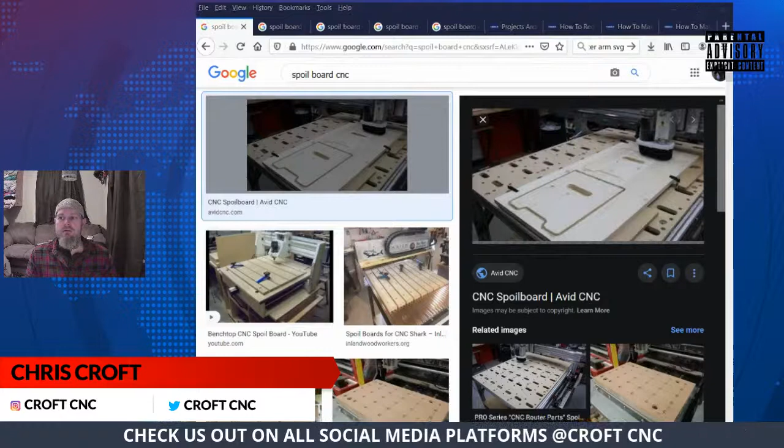This Avid CNC is just an MDF top bolted to an extrusion system underneath. Nothing really of merit on that. It's simple, it's functional, and it gets the job done.

This one actually utilizes a T-track system on top of an MDF slab. Same here, this is an aluminum extrusion bed with T-tracks.

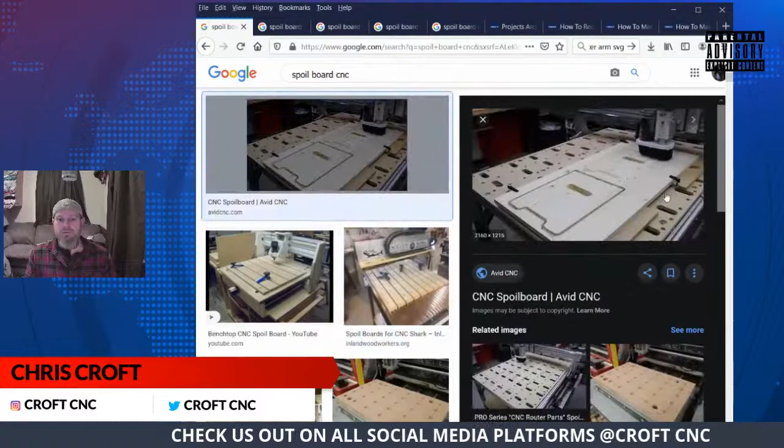These have different clamping capabilities. The Avid CNC has hold clamps for large panels. They have bolt mounts for different clamping of thinner material. This one is basically just a screw-together, quick fixture.

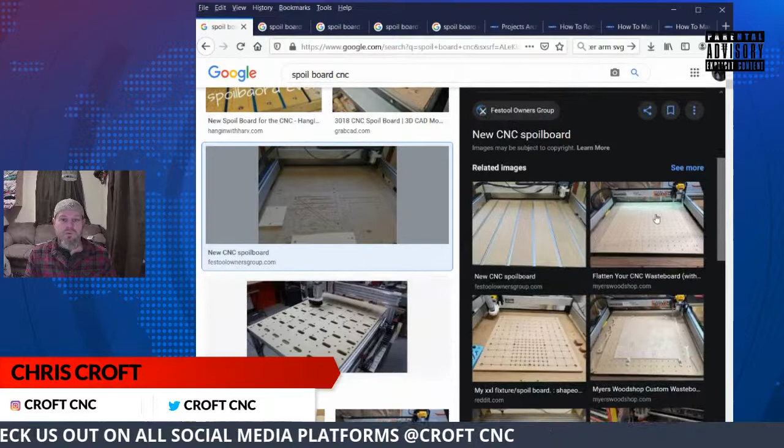This one is a nutsert spoil board where you basically run bolts into these holes to hold clamps and fixtures in place and whatnot. You can see it in use here.

This one, same setup, but different clamping systems, different offsets for clamping systems. There's always a plus and a minus to spoil boards.

This one has a screw system with a dog hole system. So you put these bench dogs in there, and that gives you kind of like a zero plane for X, Y, and then you zero off the top. It has the push clamps, like you could fit a Festool push clamp set in there. Those holes are usually 20 millimeters.

Festool kind of paved the way on a 20 millimeter dog hole system. I'm not quite sure why that took off the way that it did, if it was just marketing on Festool's part, but it is what it is.

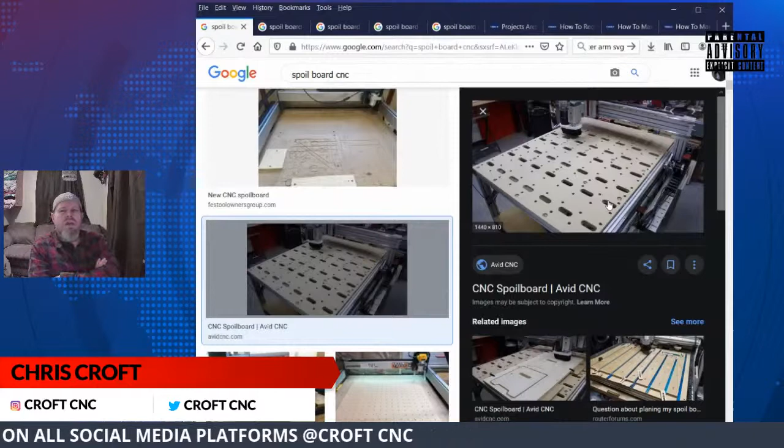A lot of people get hung up on spoil boards, and I can't understand why. So for the CNC for Newbies machine, I'm using a simple Avid style spoil board, single sheet of MDF. It says it's 4x8, but MDF is usually an inch oversized.

The CNC for Newbies machine has 50 inches by 99 inches of travel, and it has spacing: 17 and a half, 35, and 53 are the cross braces, and then zero, the zero point on each end.

So my spoil board's not quite going to cover the whole travel of the machine, and I'm all right with that because I'm not really going to do much. What I will do is put covers over the edge to protect the linear bearings, and then mount on the spoil board.

So what I'm actually going to do is overhang my spoil board to the front and to the sides. I'm actually going to go a half inch off of Y home, and a half inch off of X home, and go 1 inch off of XY, and line my spoil board up.

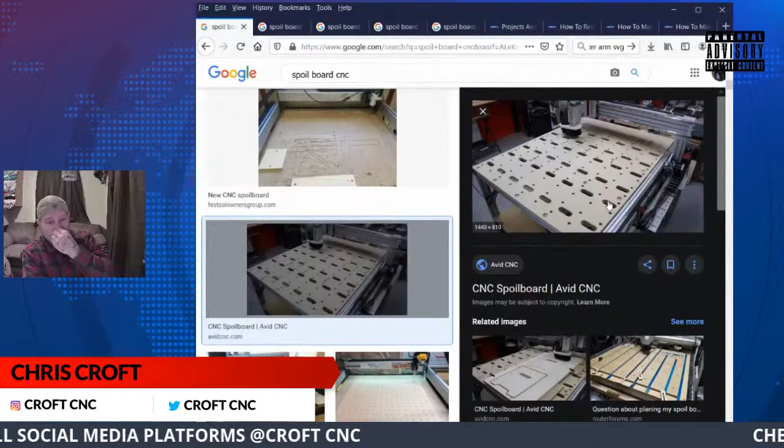The way that I'm actually making my spoil board is I'm using an Avid style with the clamps and the bolt holes. And I'm going to put a pin fixture system on X1, Y2. I'll make like probably a 12-inch fixture system, I think. I still have to kind of figure out where I want to go with that.

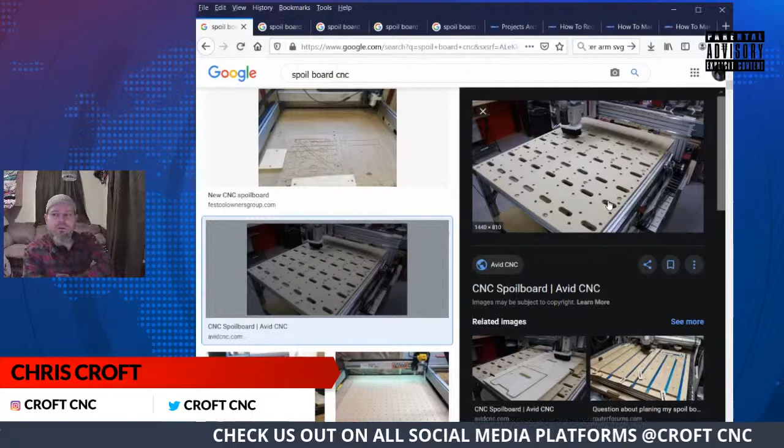I might do like a Mark Lindsay bump stop and go from there. I'm not quite sure how I'm going to facilitate what I want to do there. I'm trying to see. So we've got different setups here.

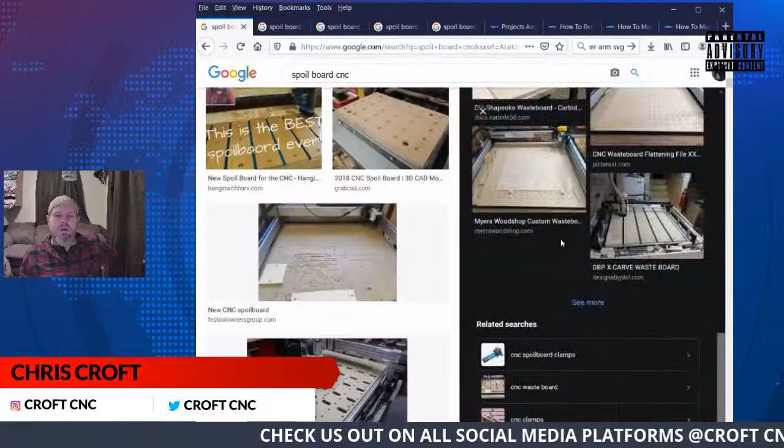I showed you the different kinds of setups, and I explained a spoil board is just a sacrificial board to be able to hold material and cut through material. On a lot of things like the X-Carve, this is the spoil board. My spoil boards are pretty destroyed. I'm pretty rough on them, just because.

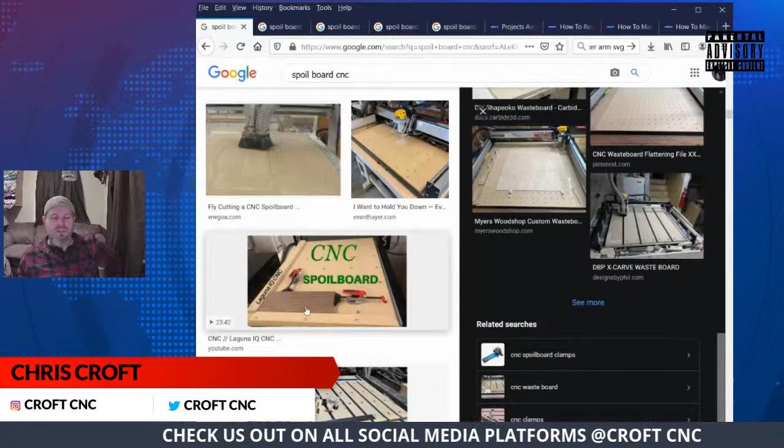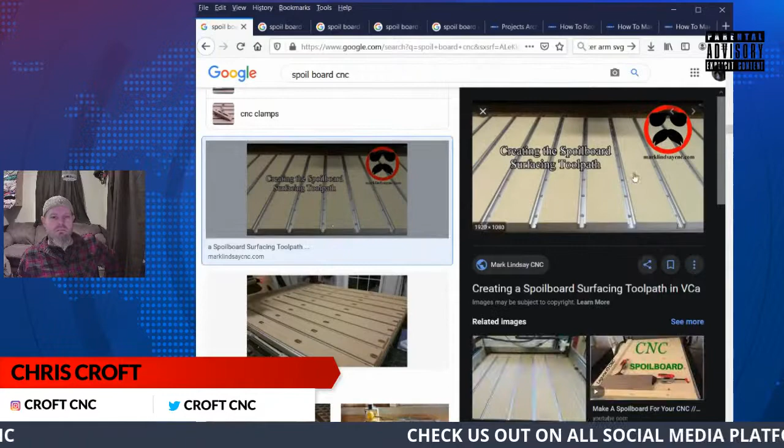But one thing that you want to do is definitely figure out a fixturing system on clamping and positioning. And you also want to make a bump stop zero fixture. I recommend watching Mark Lindsay's bump stop series. And then you need to actually tram your machine first.

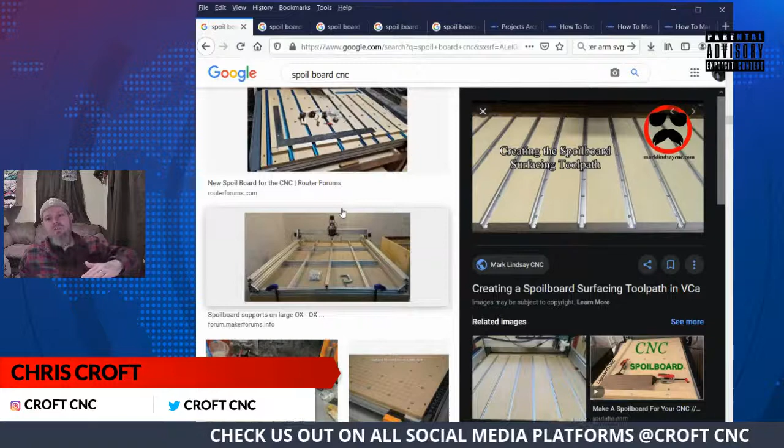So you need to plumb, level, and square the machine. Then you need to tram the spindle. And after you tram the spindle, you can then surface your spoil board. What that'll do is take the actual surface and make sure that it's flat all the way across in reference to the x-axis.

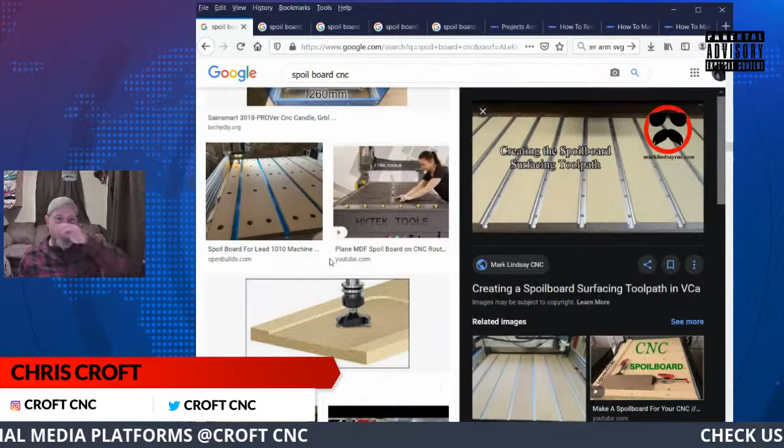And that makes sure that whenever you put stuff on there, it's all the same level plane in reference. So that's where we're at with that. And go from there.

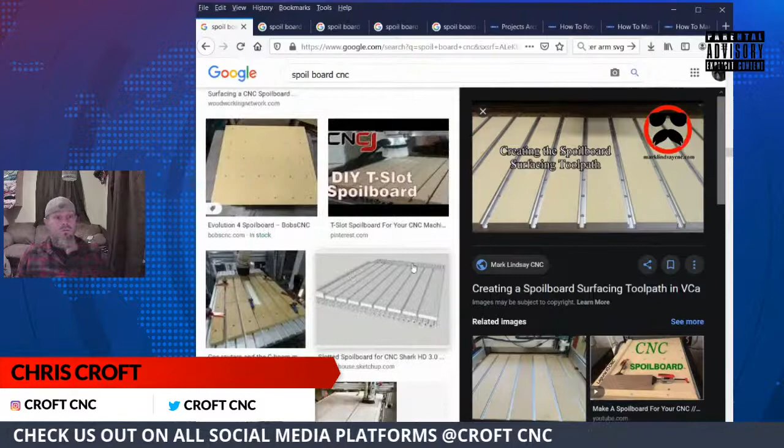Yeah, you definitely want it parallel to the gantry, John. And that's basically where we're at.

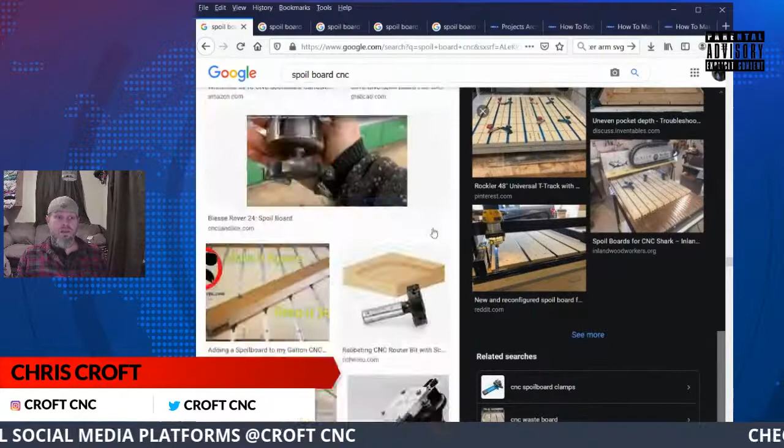So that's your spoil boards in a nutshell. Nothing spectacular. I'm actually overhanging mine and going from there. So that's that.

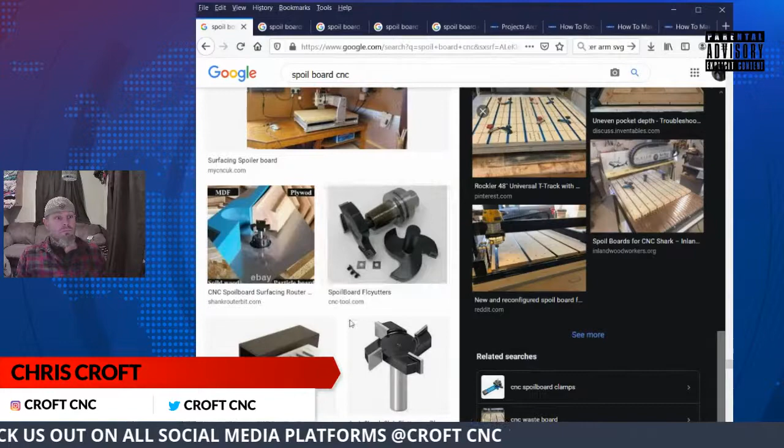I'm just trying to see here where we're at with everything.

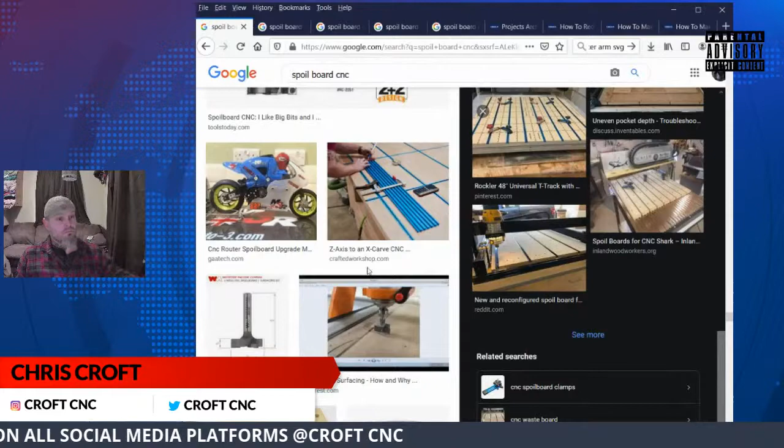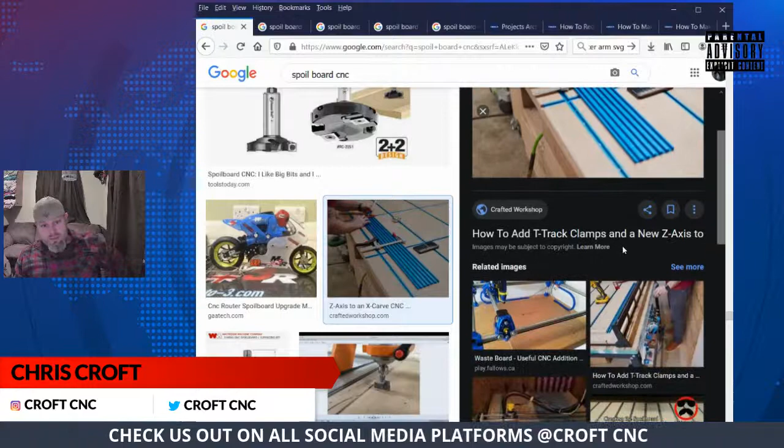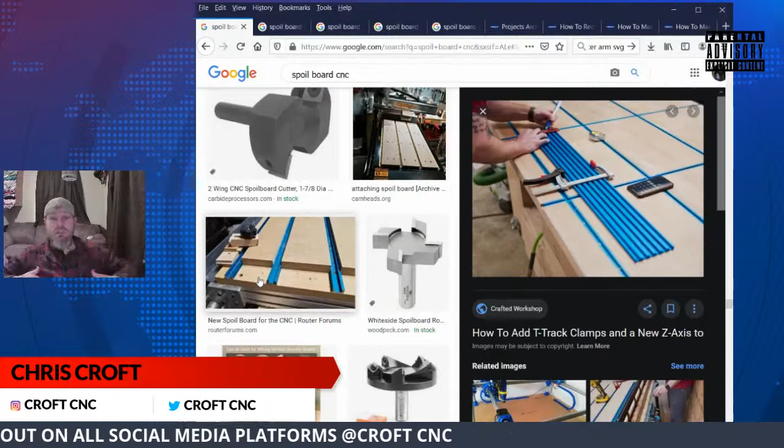This is a T-track system, and go from there. That's one of the things I find a lot of guys, whenever they use T-tracks with a spoil board, they don't inset them and solid mount them. So for me, whenever I do T-tracks, I'll actually cut in and then I'll put a secondary piece of MDF over top of the T-track that actually pinches it down. And then I'll put my screw holes in these sacrificial pieces of MDF.

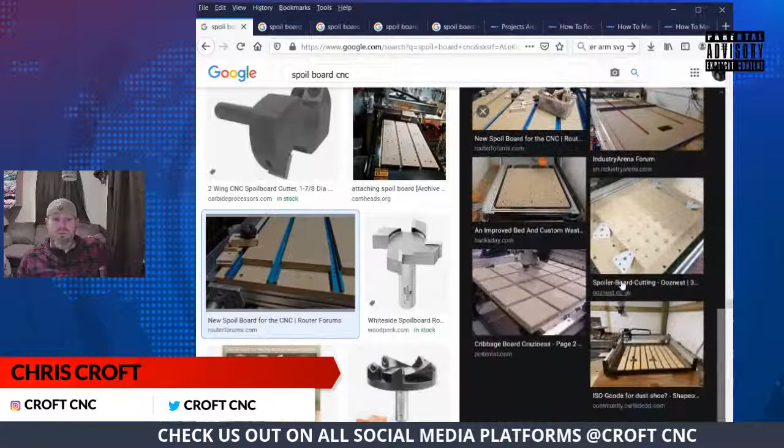So that's pretty much all I've got on that. And that'll be about it.

Just going through making sure that there's nothing major that I missed. And right now there's really not.

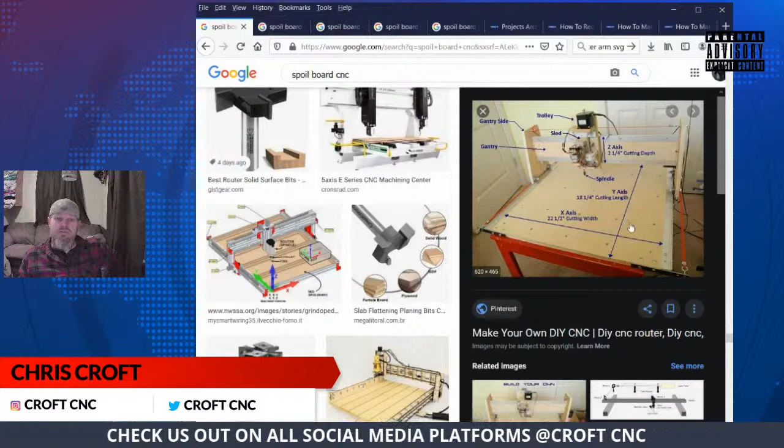Here's a spoil board where parts of the machine are actually mounted to the spoil board. So the spoil board is an integral part of the machine. So if they ever cut through this and have to replace it, they're going to end up replacing the whole machine. Now, a machine like this, usually you're going to upgrade it over time. So this will actually change.

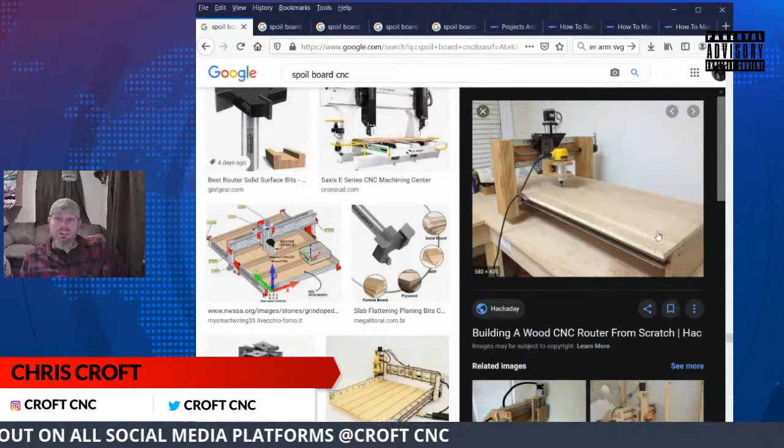Another one where part of the spoil board is integrated into the machine, like my X-Carve and CNC for Newbies, and my DIY machine is not like that. It actually has an extrusion base, and then MDF sits over top of it.

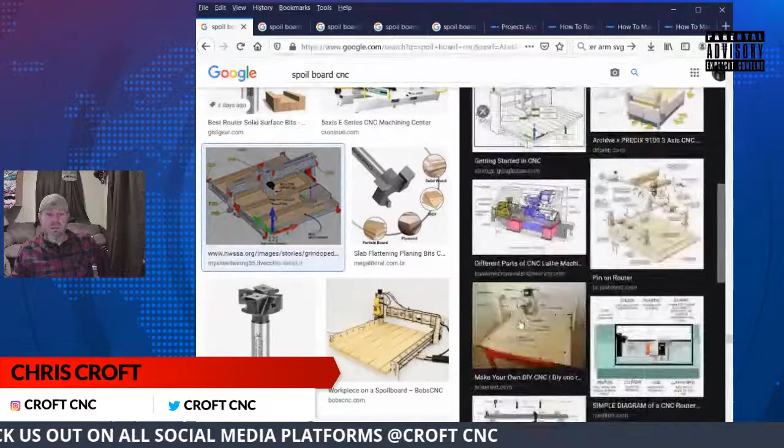And that's kind of the way a lot of the hobby machines, machine kits work - they have MDF spoil boards, but have a cross brace system underneath. A lot of the entry-level DIY wood kits, you'll find that they end up having a system a lot like this, where it's basically an MDF base for the machine guides, and then it sits on top of some type of truss table or something of that nature, and then they actually just router surface plane another sheet of MDF over top of that usually.

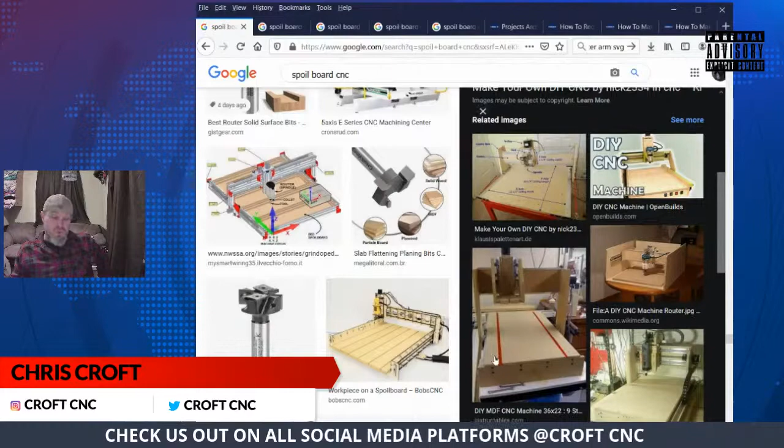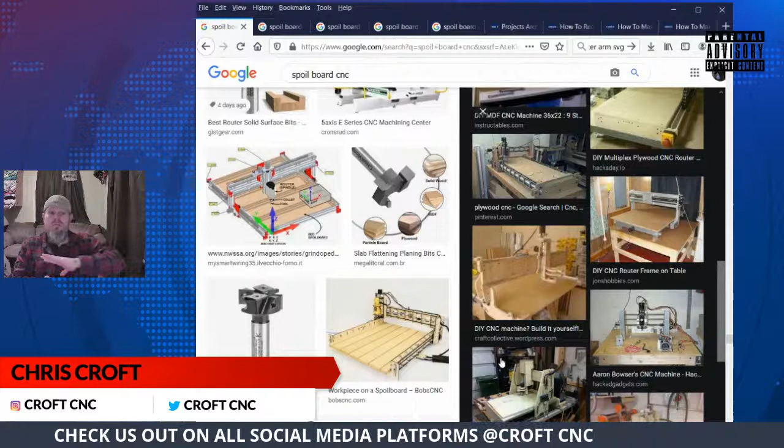Something to think about when you're making your spoil board is how much Z clearance you have. So for me, on the CNC for Noobs machine, I have 6 inches. So if I put a 3/4 inch spoil board on there, I lose 3/4 of an inch of my Z height. If I put 2 layers on there, I lose 1.5 inches. Okay, so I can take that down some by surfacing the spoil board, but you don't want to make it such that your clamps and stuff will pull out, okay? Because the whole purpose of the spoil board is to be able to cut through the material and also somehow mount the fixtures or the material itself to be cut.

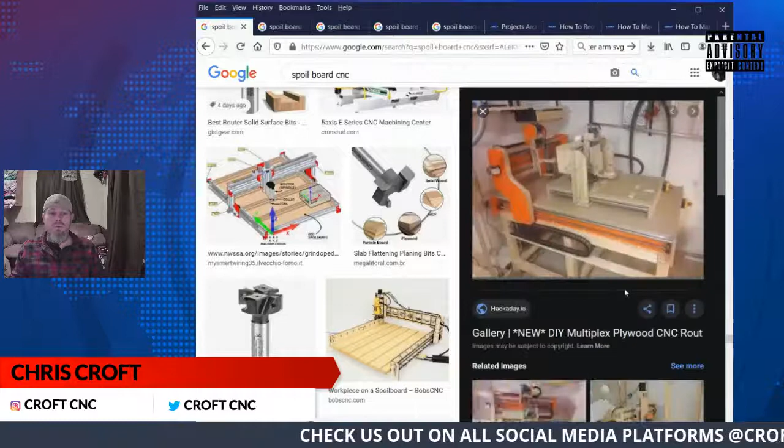So, this is one - they actually use an aluminum base on some of these. That's not actually one of them. That's just a bad picture.

Let's see if we can find an aluminum spoil board. This is usually the grading system underneath of the DIY kits.

Now on these, you will actually put the material itself, or you'll put a sacrificial board underneath of the material, so that when you cut through, you don't actually cut into the bed of the router. Okay, that's really important. Same thing goes with a mill. If you're going to cut through, you need to make sure you accommodate that by putting spacers under it, put a sacrificial plate under it.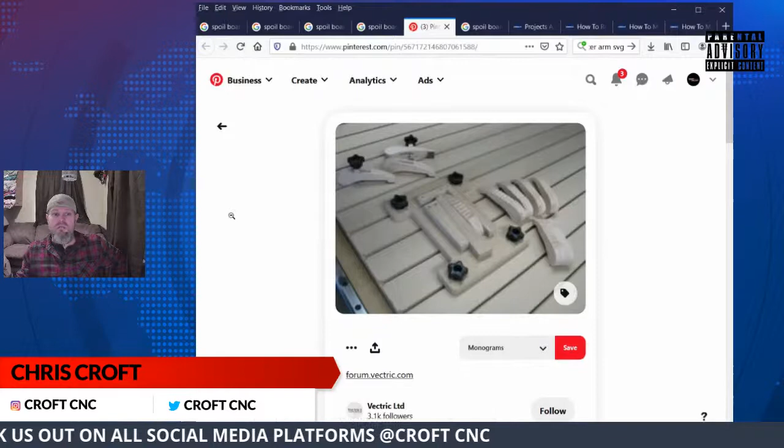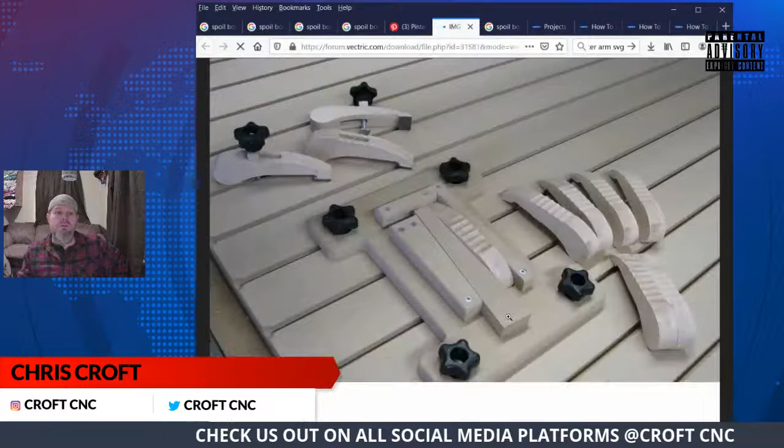This is an example of a spoil board with a fixture for work holding. This is the machine spoil board, and this is a sacrificial spoil board with what looks to have T-tracks in it. Then this is a clamp fixture with a wedge system. These knobs screw onto bolts that are in these T-tracks, and that's how they made the zero plane, or the work coordinate offset, and then that holds the material here to be machined.

So this is a fixture or a jig. This is a T-track on top of the surface board or spoil board. It's kind of interchangeable, kind of not. For layman's terms, yes, it's interchangeable. For actual machining conversation, no, it's not interchangeable. And there's a difference between fixtures and jigs. A lot of people don't realize that.

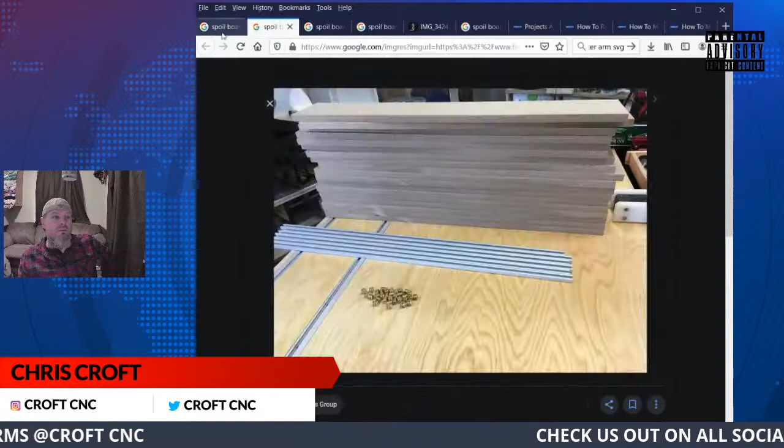This is a square jig for squaring on that.

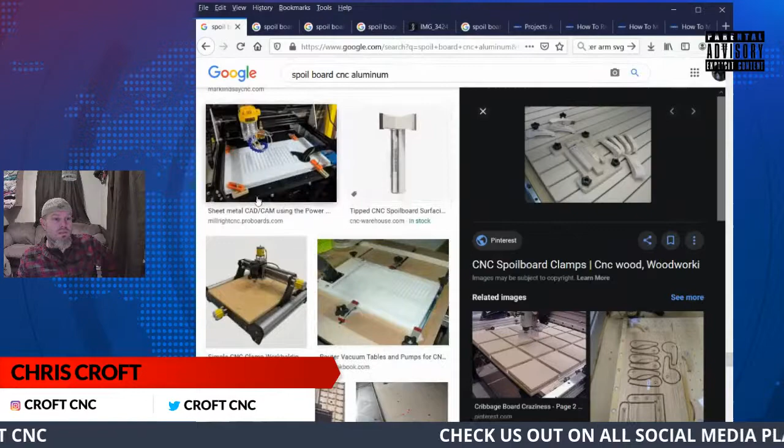Still haven't found an aluminum bed. I was hoping to see something like a Shapeoko or Nomad pop up.

Okay, here's a Stepcraft. Stepcraft has an aluminum bed. It's all one aluminum extrusion, I think. I don't think it's strips, I think they're actually one-piece beds. But I can't be quoted on that. And then on top of that, you put the MDF.

Now there's another type. Oh, here's a spoil board system out of aluminum. But the really cool part about it is what we were talking about: it's vacuum. You can apply a venturi or a vacuum pump, or whatever you see fit, to actually make your own work hold down using vacuum. That's always really nice because you don't have to...

John asked if I'm mentioning cam hold down systems. I haven't yet, I'm going to. That's actually where I was going with it.

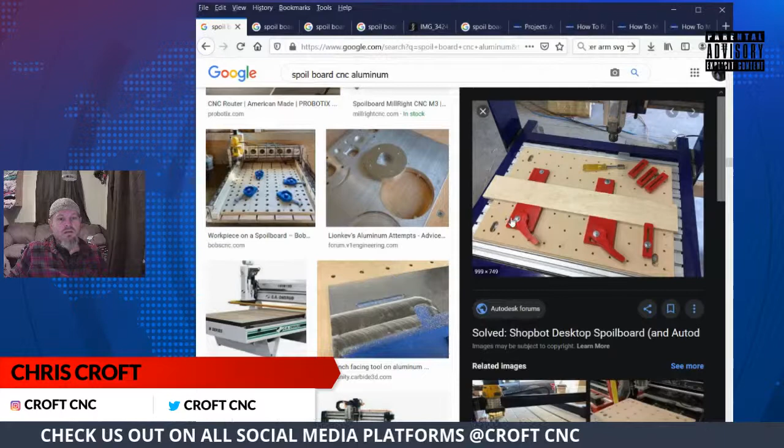Here we go, here are cam clamps. This is the work holding system that John was talking about. You'll have a stationary clamp back here, and then these clamps actually have an oblong, elliptical cam to them. So you have your center point here, and this is further out than this side, so it's actually offset. As you push this handle up, it's going to put more force right here. That's called a cam system.

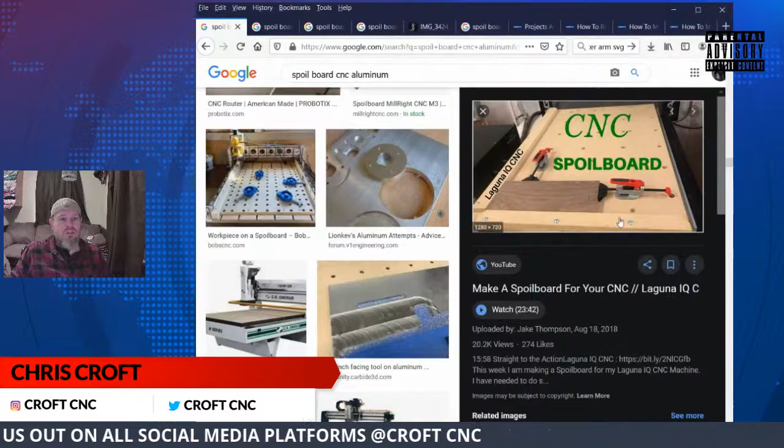Here you can see the push clamps in action against a bump stop on the X and Y. These are just simple hold down clamps.

This is a cam clamp system being made. You can actually see here it humps out right there and then levels out here. So if you put a bolt in here and push this up against a piece of wood, it's not actually going to touch or put pressure here, it's going to put more pressure here. These are just smaller cams, you can see them in action here. And the size of the cam is based off of the offset of your work holes, your spoil board holes, your mounting holes, and the material size.

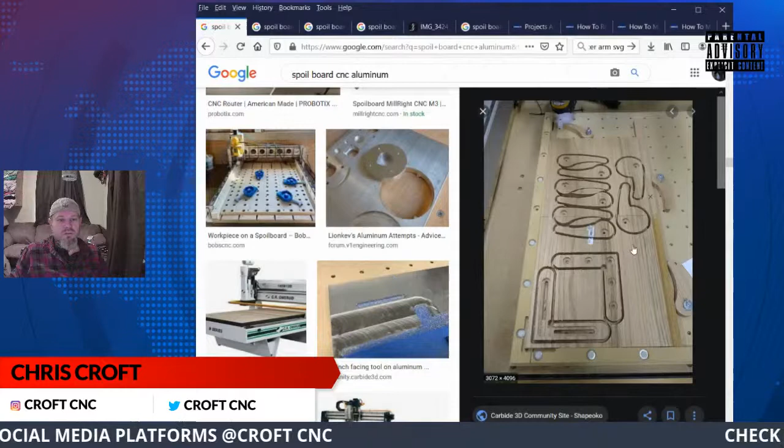So these are bump stops to set zero. These are cam clamps with a sacrificial board in here so as not to mar this, and they cam clamp here, here, and here to put pressure against these boards. Okay, here's another one, you have your zero points and then your cams. So here's some cams mounted on a T-track system with multiple holes to be able to mount in different locations for camming.

And that's pretty much it. That's all there is to it.

Not super exciting, nothing. This is one of those.

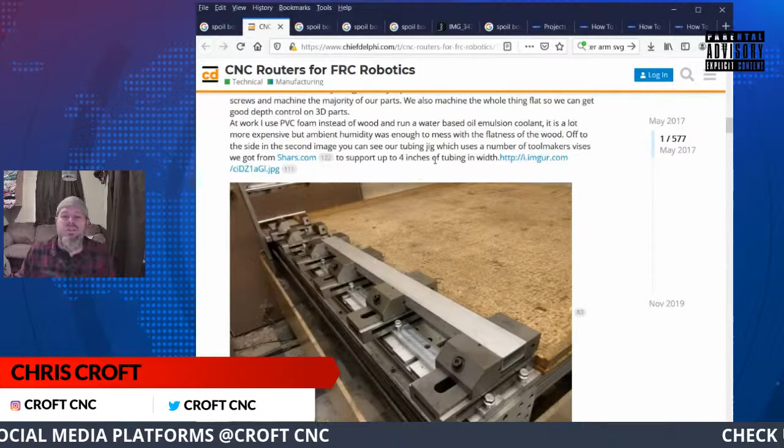Okay, here's a cool one. This is a T-track system with machine vices mounted on a long run, and that's always a great system. You guys will have to excuse the noise in the background - those are plow trucks coming through plowing us out. We got like 4.5 inches of snow last night.

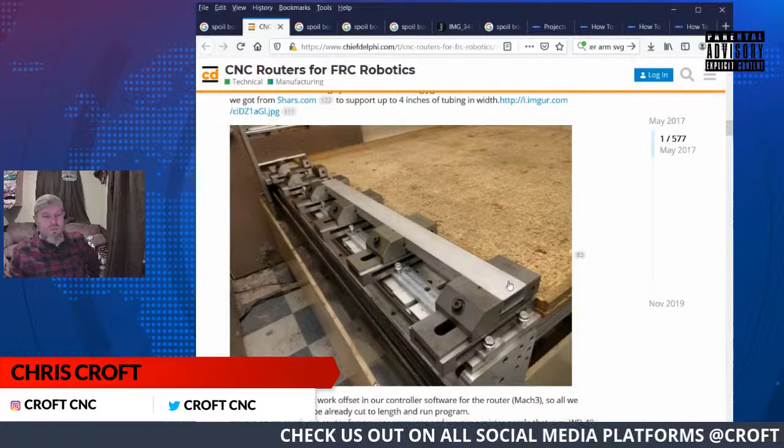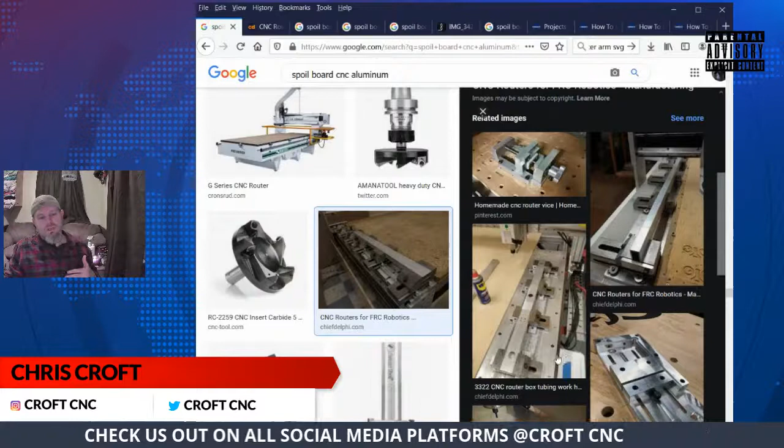Well, yesterday into last night, so if you hear the scraping, that's what it is. But basically, here's a bunch of vices set up holding an aluminum extrusion or an aluminum tube that will get machined. So you can see the work holding and spoil boards and stuff like that - fixtures and jigs - they're often an overlooked part of the system.

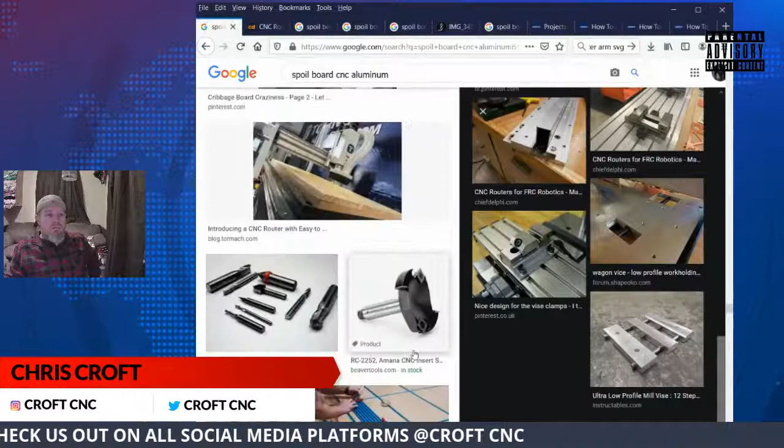And when you overlook that part of the system, you're really not utilizing your machine to the best of its ability. These are low profile vices. This is a clamp vice. A lot of these can be implemented on a router. I've seen all kinds of stuff - routers cut steel, aluminum, bronze, brass, stuff like that. It's just a matter of making sure you have the correct tooling and that your structure is solid enough to handle the speeds and feeds you're throwing at it. That's basic 101. It's nothing spectacular, but it's often overlooked, and I don't know why.

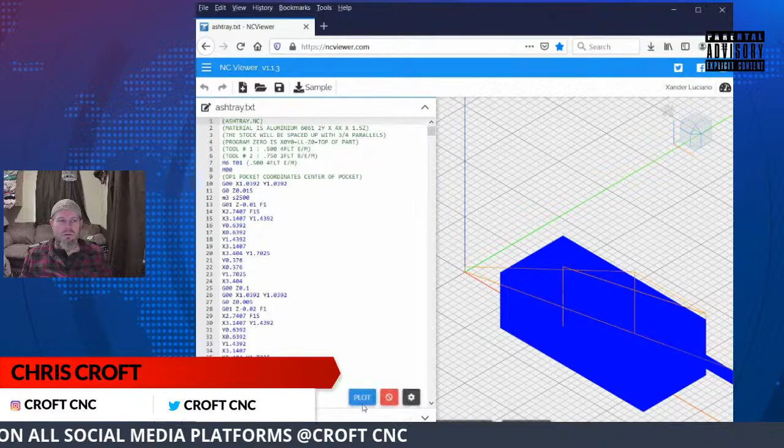Okay, now we're going to run through this. The nice part about running through this is you can actually go right to here. Let's shrink this down, and you can play right through your G-code. You can see where it's actually going to take place.

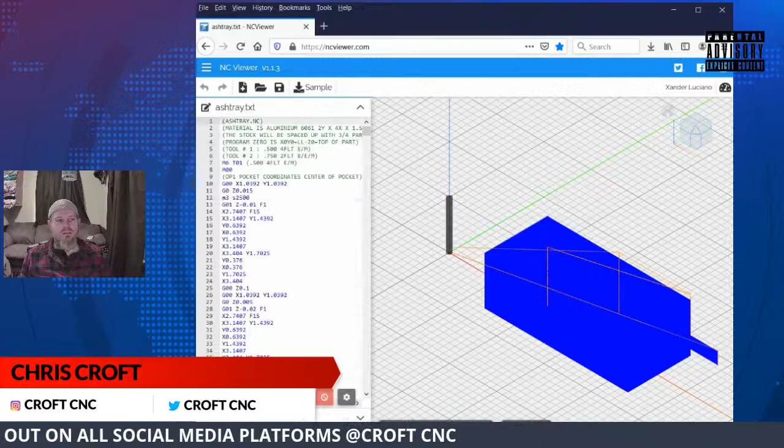So these are your forward and backs, and this will tell you your movements. So right now, we're actually over here. We need to zero the machine. So this will tell us where we need to zero the machine, and then it'll run through everything that we use.

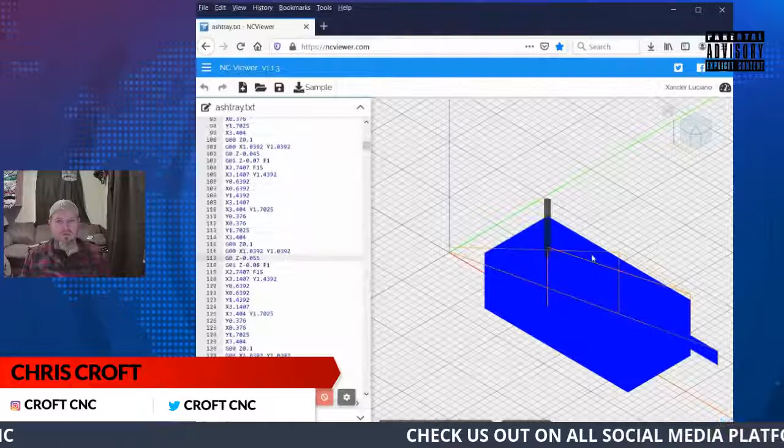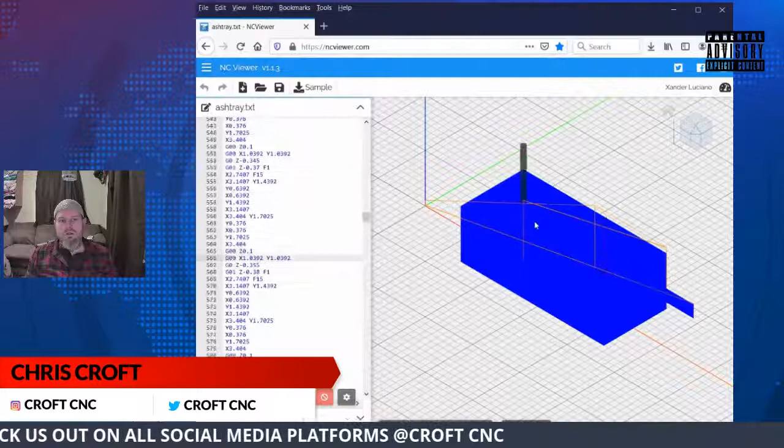So this is just plotting out our machined pocket. It's not giving us the material outside or anything like that unless you have that designed in your part. This G-code didn't have it designed in the part. We didn't need it.

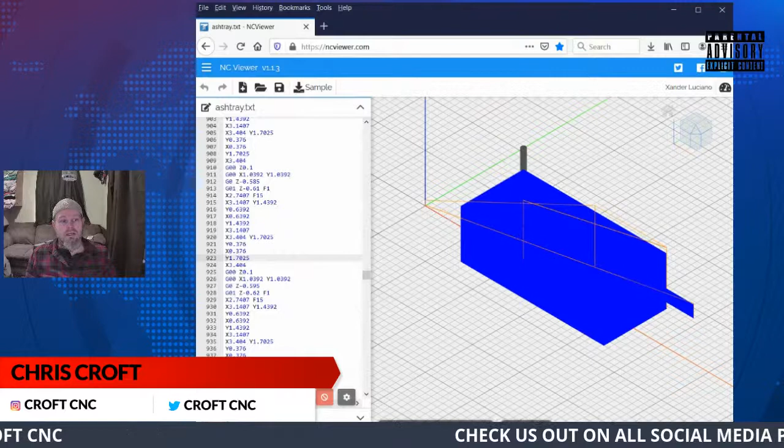Now, I see something that I don't like. We're right in here. I can actually back this up line by line, and then I can go in and edit that G-code. Maybe

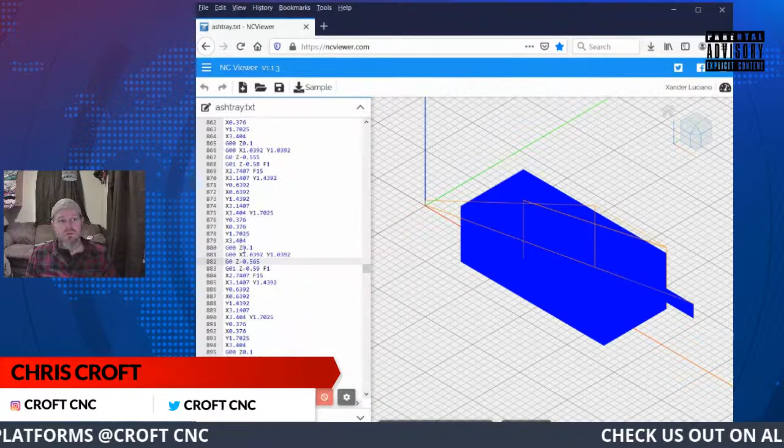Okay, so here's a Z movement. So we do a clearance, a G00, Z0.1. That takes it up to a clearance height about an 1/8 inch above the aluminum, giving the coolant the ability to push underneath the tool and clear out the chips.

And then it goes to the beginning XY, and then it drops down to the original depth, and then it drops down one more time. So it goes in the downward motion to 0.565, which is a little over 1/2 inch, and then it goes about 30 thousandths more. Actually about 25 thousandths. So it goes down a little bit more very slowly, and then takes off at 15 inches a minute again.

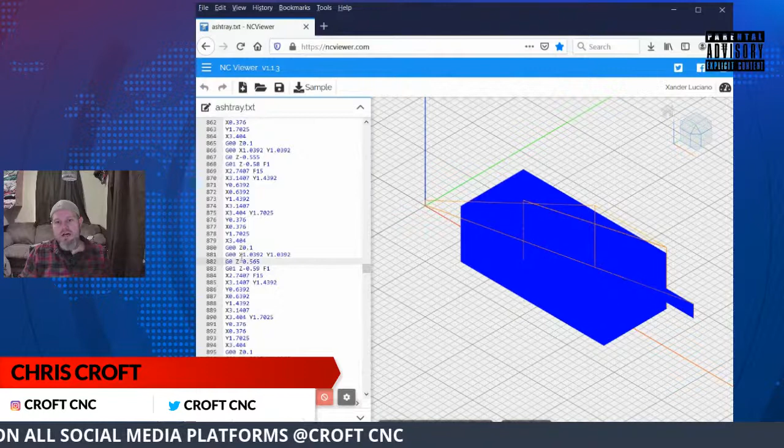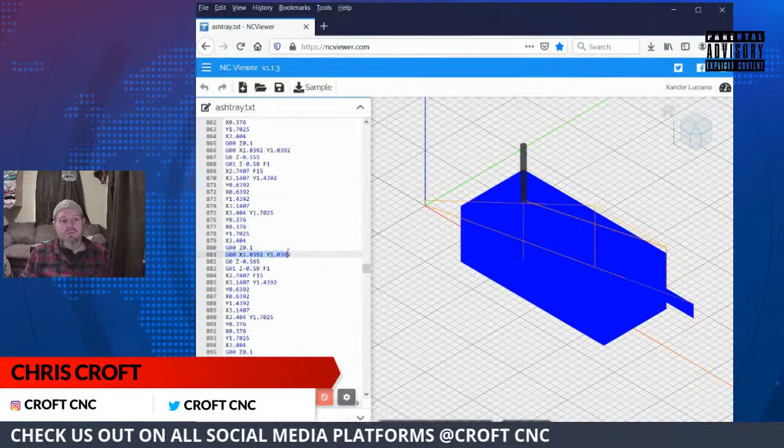Maybe I want to change that, or I want to dwell this down and not keep it up. I can go in and modify just that line. So we could take that rapid movement out, and it won't come back up. What it'll do is as soon as it hits the X point here, it will then skip over this line, and then it will move itself right to this rapid.

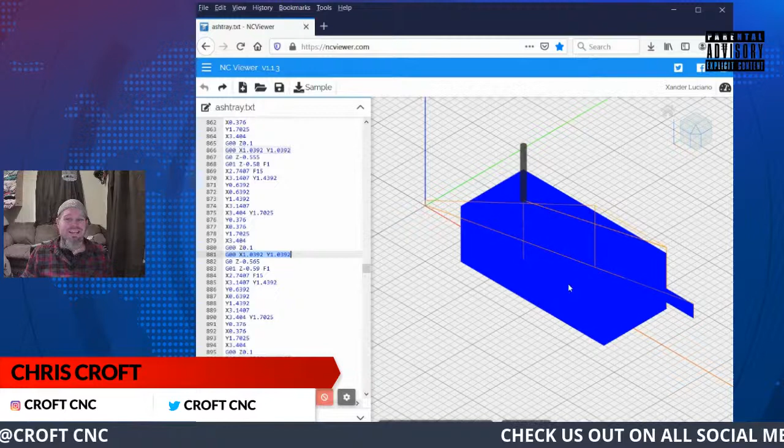Right there, so it'll be down inside that block. If there's anything in that pocket that might obstruct it, you can hit your end mill and snap it. That's why there's that Z clearance there. That's to save your end mill or your tool in general.

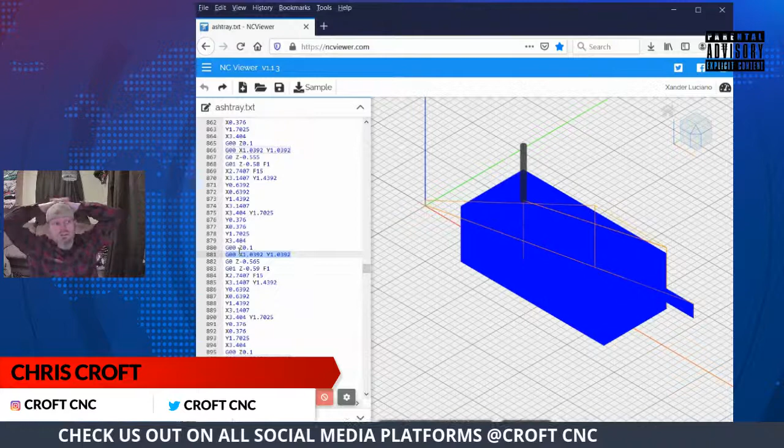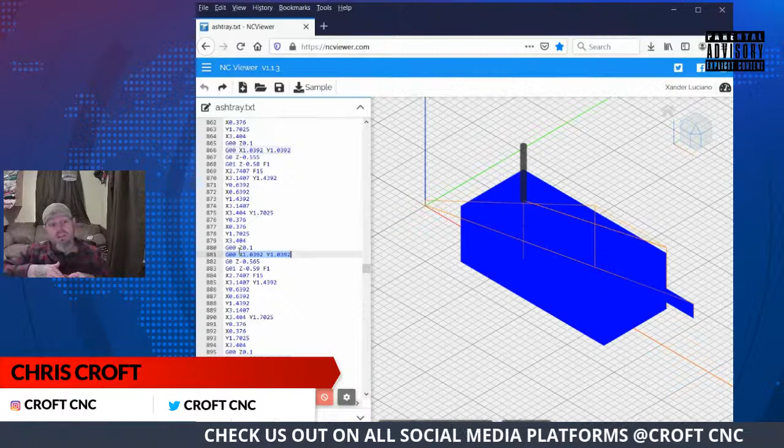But you may not need that. In this case, I don't, because the step over clears that pocket out enough that I can actually dwell down inside. I have my coolant, and the pressure from the coolant and the air coming out is so high that it pushes all the chips out anyways. The only thing that Z does pulling up is give me time to flood that pocket with more coolant to cool the tool and float the chips.

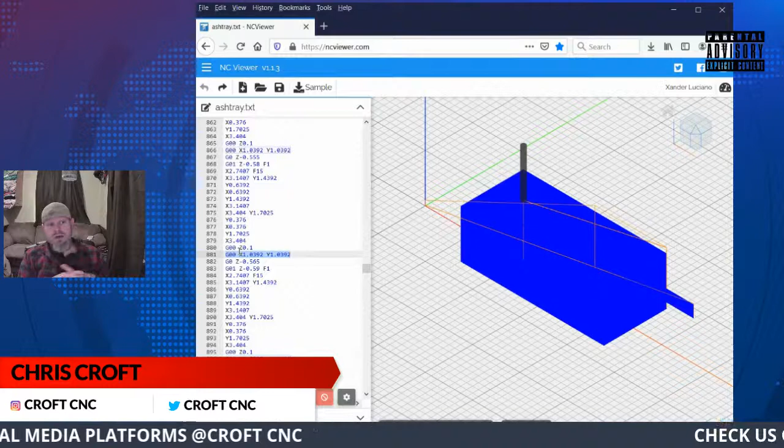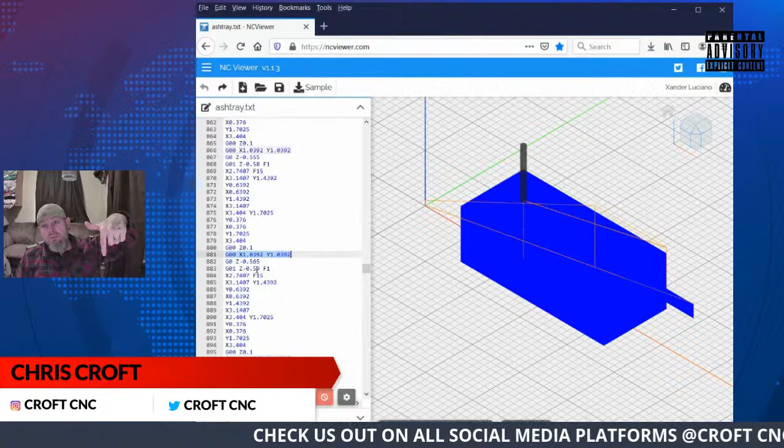Realistically, that was the first iteration of the ashtray pocket program. So I ended up doing a Z clearance layer by layer of 25 thousandths. Whatever my Z movement down was, I just cleared it by 25 thousandths up. Let the tool come up, get the bottom cleaned out, and the coolant flushed out.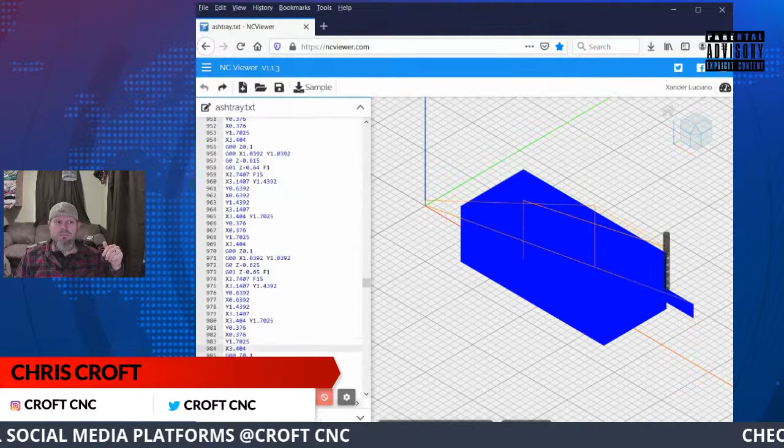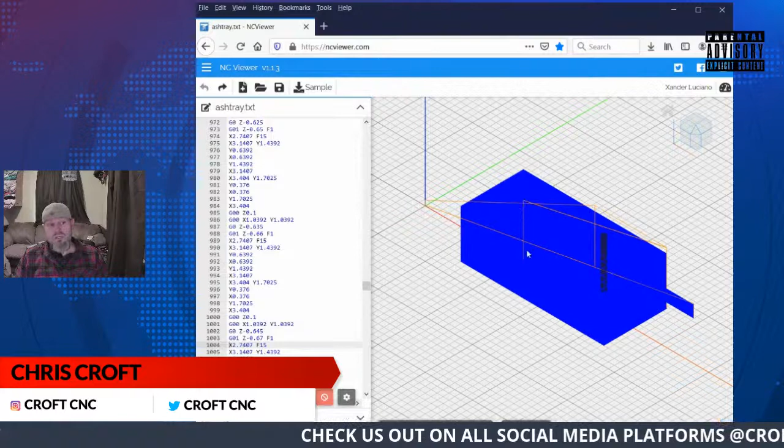So this is a product that I use, and you can go line by line and see exactly what your tool is going to do. What it's doing right there is it's disappearing because it's actually moving down. It's moving up and moving down, and it's just clearing out that pocket.

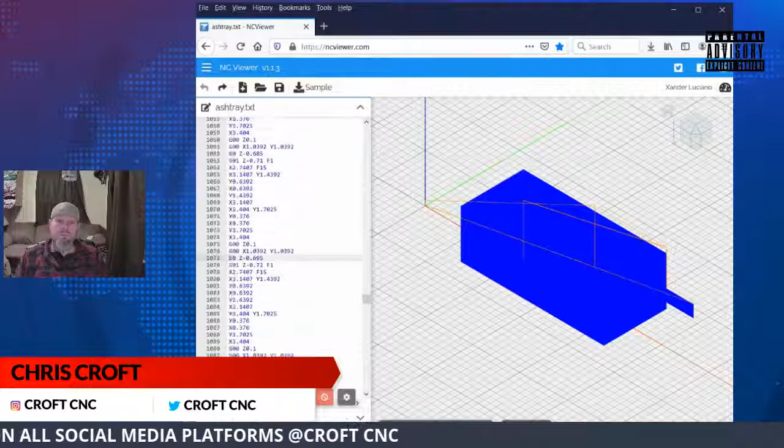We'll sit here and let it run through. And what I'm looking for is anything that might influence a crash or anything like that.

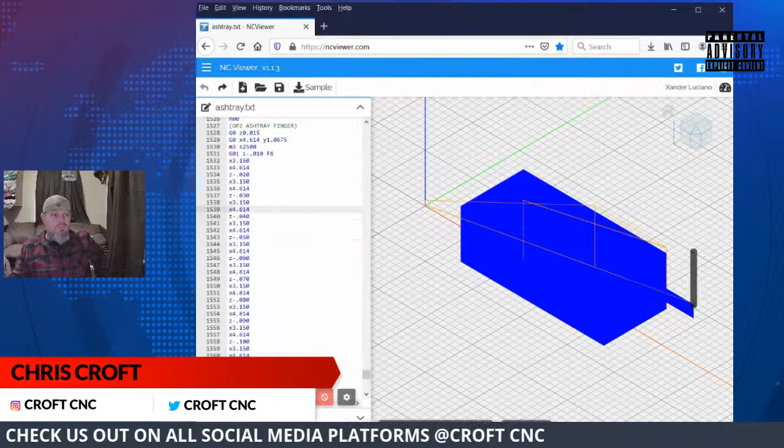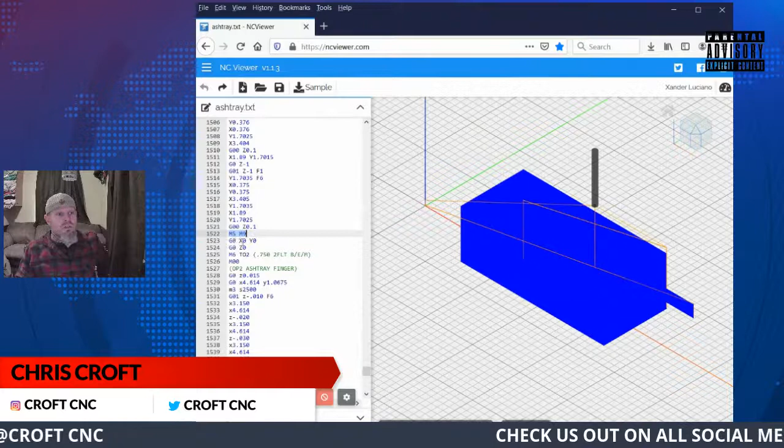So now, let's see here. Now we're changing operations. Right here is my coolant off and my spindle off. Then this goes to the 0 point right here. So this movement takes us to 0, which puts us at the top of the material. Now we need to do a tool change. This says M6 is the tool change macro, and I need tool number 2, which is a 0.750 2-flute ball nose end mill.

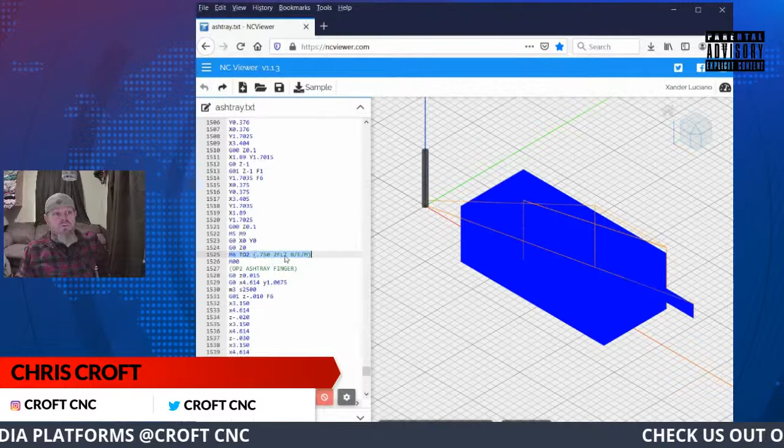Everything's cleared out. Operation 2, ashtray finger, that's where the cigar will sit. That goes to the Z clear. So you can see it moves from there and moves up just a little. It only moves up 15 thousandths for clearance.

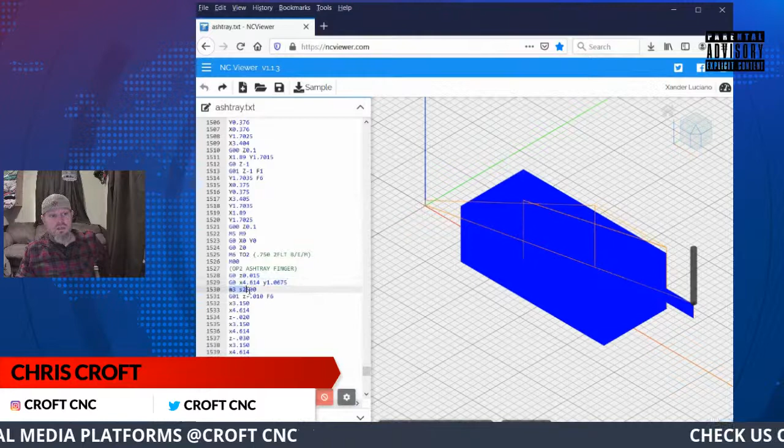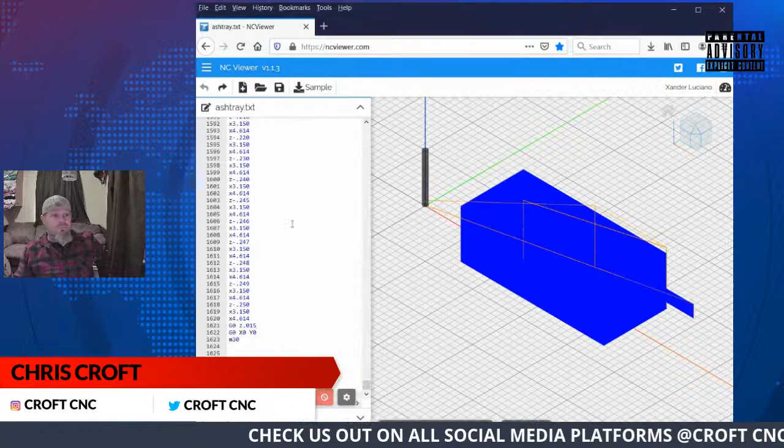Then it goes to the start of the finger, which is actually off of the material. Then that turns the spindle on, and this starts the feed, and it just goes back and forth all the way down. And now the program's done. This is our G0 to clearance height, and that goes back to 0, 0. This ends the whole program.

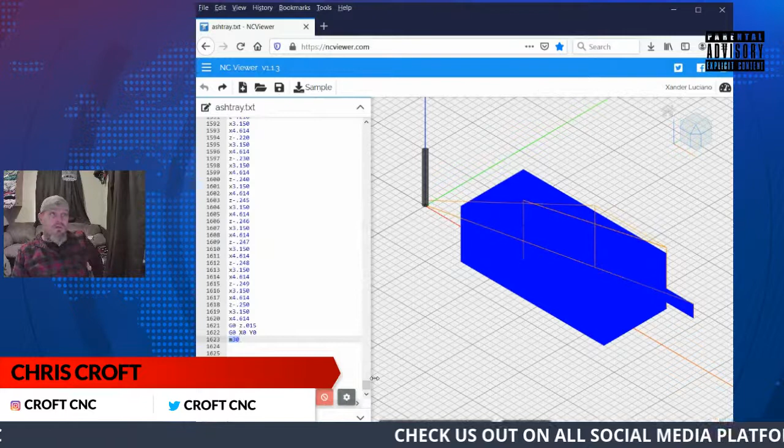So all it is really, this is a really simple program, and that's why I chose it. A lot of people don't understand what's happening with their G-code. The one gentleman that actually asked me what was happening, it turns out that he was post-processing in one program, and then he was importing into another program, and that was actually adding header and footer information, turning off some of his other parts of code, and he was crashing and ruining parts and tools.

So these things, you have to learn how to read them, and then once you learn how to read them, you'll learn how to edit them. And once you learn how to edit them, you can really take some time out of your programs.

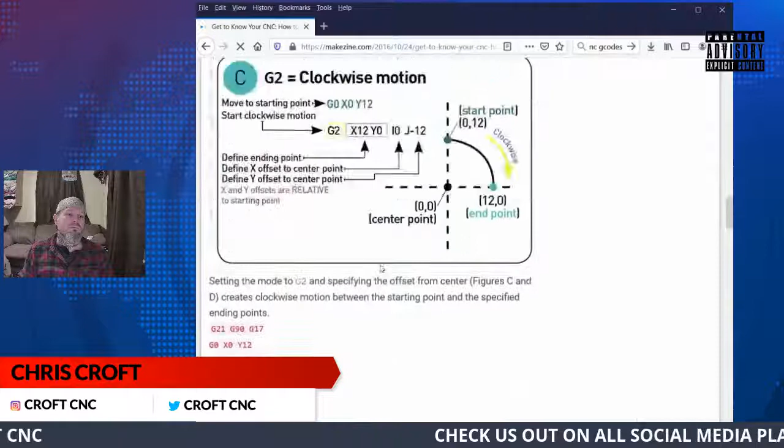Let's see here. Well, I know I can get the Grbl. Grbl G-code commands. That's actually the Grbl firmware.

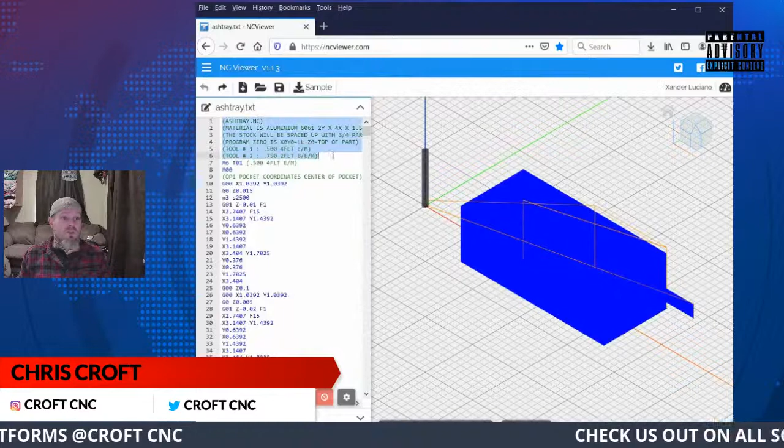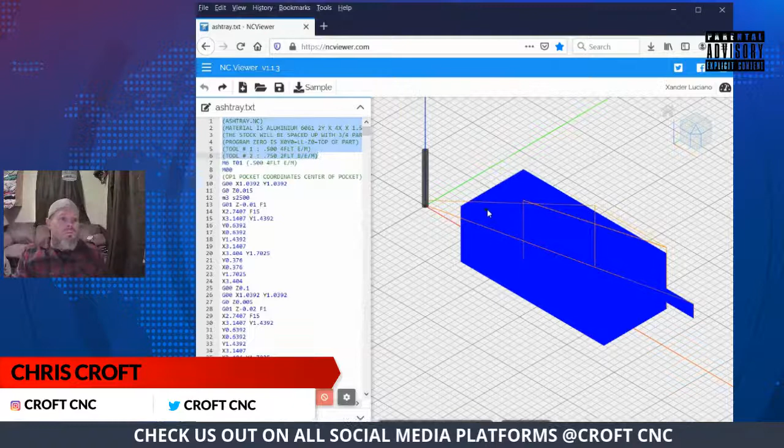These are all the G codes. So like this is a macro. Yeah, those are all macro based. But this is all stuff that you should have in parentheses in the top part of your program. Let's see. Right here, this is all stuff that you should have in there whenever you're doing a program. And you can handwrite that just by putting parentheses around it. Sometimes Grbl doesn't like it, but it doesn't really matter. But that's all stuff that I add to my actual programs, and it works out well for me.